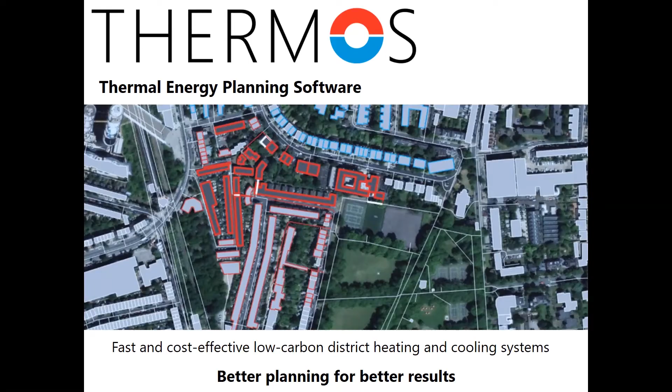Heating and cooling is one of the most crucial parts in order to eventually accelerate the energy transition as a whole and connect the different energy sectors. THERMOS can be part of that transition and accelerate it. ICLEI is of course not the only one who has developed this software. In the lead was the Center for Sustainable Energy, but many other partners were involved in this Horizon 2020 project, within which THERMOS was developed. We had two universities, Aalborg University and Imperial College London, and also consultancies and energy experts, institutions like Dena, Creara, Cape.

Because the focus was on helping cities in the first place, we had 8 different cities across Europe involved in sharing their needs and guiding the development of this tool, and that's why it is based on city needs and driven by cities. In a nutshell, it's an optimal solution for 4 key scenarios: the expansion of existing district heating and cooling grids, identifying local energy demands for known energy sources, and finding the best route for any pipe work.

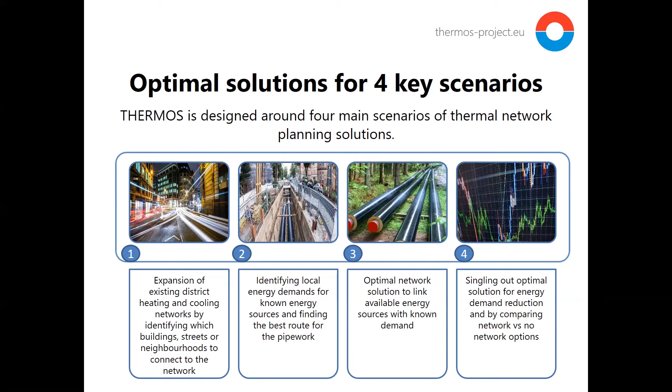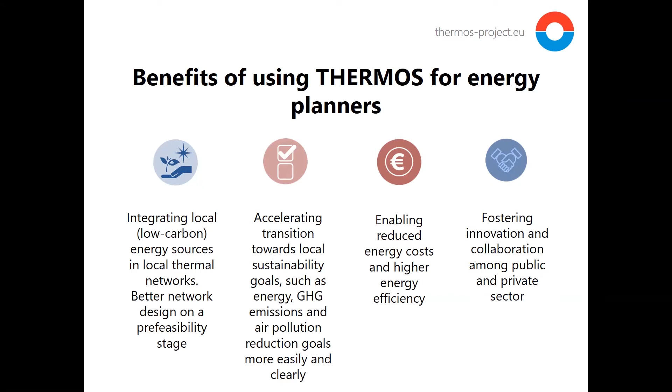It's a solution for optimizing the network to link it with available energy sources, also waste energy and renewable energy sources, and it provides you the opportunity to single out different options for how to best plan your district heating and cooling system. It has many benefits. One benefit I find quite interesting: through the visualization, we are enabling different stakeholders to participate, political decision makers, energy consultants, in dialogue with municipal technical staff, universities, and so on, with different levels of expertise, to decide about the best and optimal solution for local thermal networks.

There are many stakeholders this tool is for, local and regional authorities in front, but soon we realized utilities, research, academia, project developers and consultancies were also at the very core of this software. So I'm open to hear your thoughts on how to use THERMOS within your perspective and application. Last but not least, we have tried to build trust in the software, validating it through various universities, engaging experts on an advisory board, and through our ambassador and train the trainer program bringing in different perspectives and knowledge. It's open source software, ready to be released by the end of this month. So stay tuned.

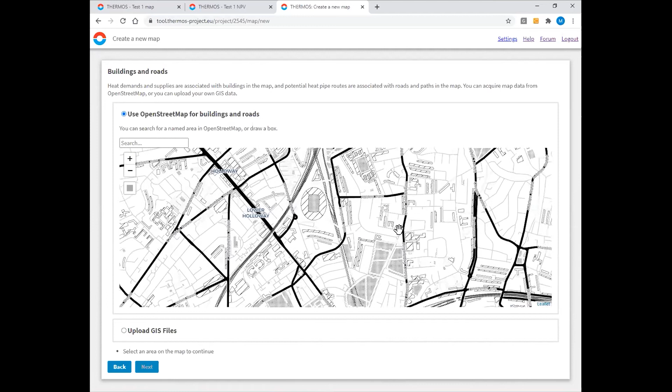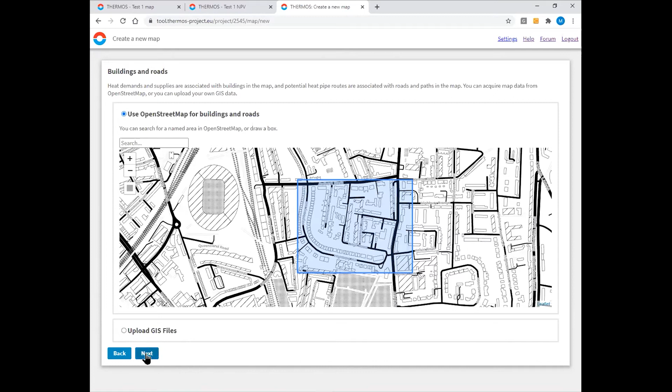So as you open this, it defaults in London. So what you can see there is central London in Islington. And if you zoom in a little bit further, you can see the buildings come into view. And what I'm going to do is select an area that we're going to be interested in, and we're going to select that area to import as a map within THERMOS and have a look at potential networks there. So I've selected that, click on next.

This is a relatively new feature. This checks whether there's LiDAR coverage for the area that you've selected. Now, LiDAR is a data set which basically gives you the height of buildings. It's not available everywhere, and it's very much up to the user to find out if there's LiDAR available for the area that they're interested in. It's sometimes not that straightforward to get hold of. In some cases, you have to pay a little bit for it. But the reason it's important to have it as far as you can is that it improves the accuracy of the energy demand estimates within THERMOS, because otherwise, if you're just using OpenStreetMap without LiDAR, it will estimate in a kind of two-dimensional model.

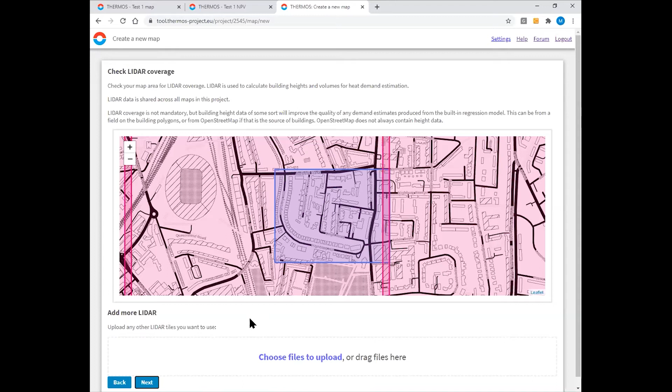So it just looks at the building footprint and the type of building. But where you have LiDAR, it will know the height and the volume of the building, and it can start to infer the surface area of the walls and the heat loss along with the type of building, and make assumptions as to the heat loads there. So in this case, there is LiDAR for this part of London available.

And then lastly, before we create the map, we just have to set the heating degree days for the area that we're looking at. We've tried to automate this according to the location. So this is basically a weather correction for the location, depending on the climate there, to adjust the energy demands. And you can also set it here. It's just a way THERMOS will group similar buildings along the same part of a street. It just makes the calculation a bit simpler, a bit less complex, if that's appropriate.

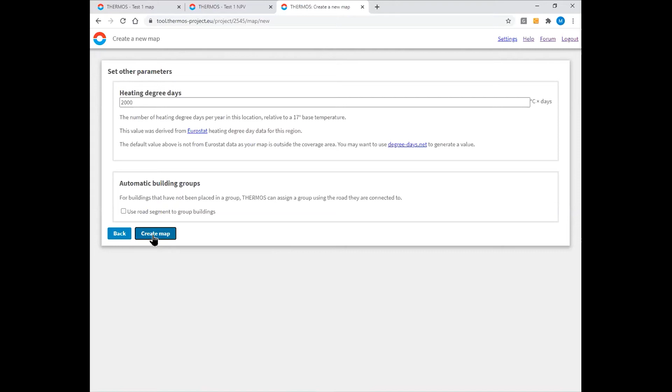We're now then ready to create the map. If I click on Create Map, you can see here that that map is now being imported. So it's taking that data from OpenStreetMap, the buildings and roads, the geodata there, and it's undertaking calculations on those buildings to establish the heat demands. And you can see the map's now finished.

And the next thing to do is to have a look at that map and start to create scenarios for networks. So if I click on HeatNet here, what we'll see is the main user interface of THERMOS. And you can see there, this is the area that we've selected and imported. It's a collection of buildings as polygons and road segments there. So I'll just turn off the satellite view just to make that a little bit clearer.

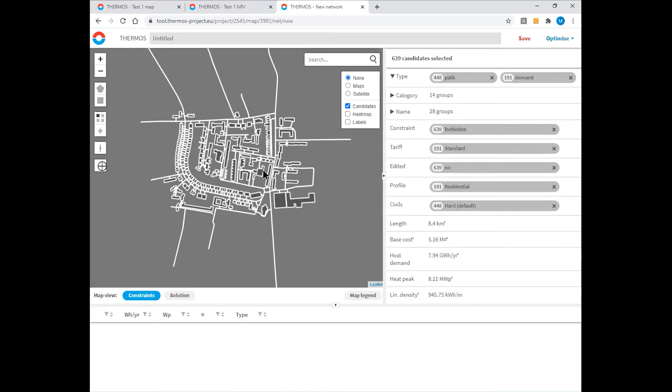And what we can do now is, for example, I can select, hang on a sec. That's better. If I select all those elements, whatever you've selected, this right-hand panel will tell you a list of information about that. For example, what we've selected here is 448 different segments of road pathways and 191 demands, so buildings. We can also look at the categories of all these elements according to OpenStreetMap.

So we have one place of worship, a church. We have 324 residential properties, for example. And also down here, we can look at the collective heat demand in terms of the peak in megawatts and the annual heat demand in gigawatt hours for that selection.

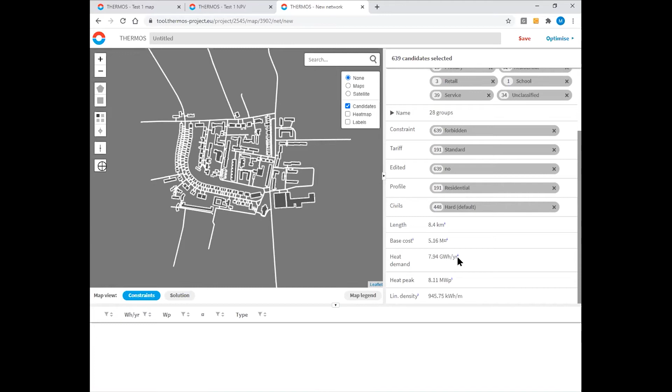So we're ready to start to create a scenario to build a network now. The first thing to do really is to select an energy center, an energy supply. So I'll just click on one of these buildings and say that's going to be my energy center, and make that a supply point. We now have to specify what that supply point is. The bare minimum is to say it's got a maximum capacity of 10 megawatts. So you can put numbers in here.

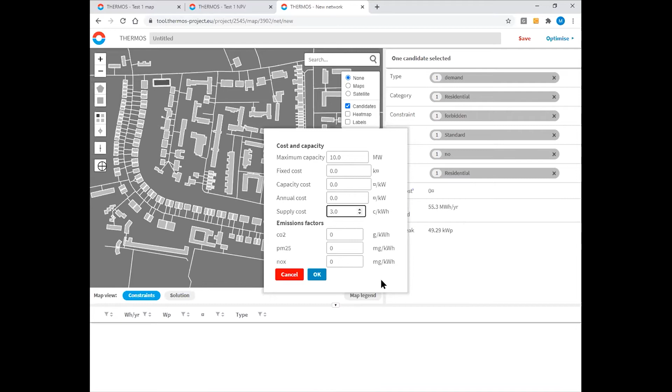You can also put your costs in, but I'm not going to do that for this demonstration. The two minimum things are the maximum capacity and the cost at which that supply center can provide heat. So I'm going to put 3 monetary units per kilowatt hour there, say 3 euro cents per kilowatt hour. And you can see it changes color to indicate that that's now a supply rather than a demand. It can also be a demand, but we're just considering it a supply in this case.

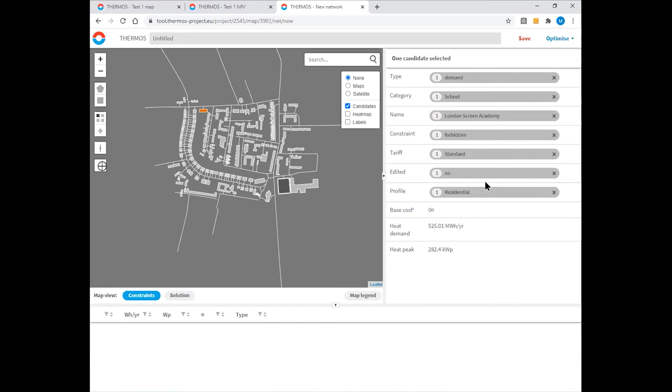So the next thing to do is to look at the rest of the buildings and the routes and say, which of these do we want the model to consider for the possibilities of making a network? We can select different elements here if we want to, just by clicking on them, and again you can see information about that selection in heat demand, heat peak, and also roads. You can select the road segments as well, and it gives the length, for example.

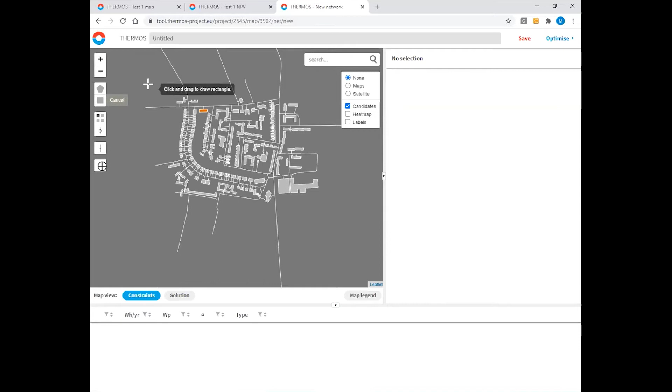What I'm going to do is select all of it really, and we can then toggle the status of each of those elements. And there's three kinds of status for those. If they're white, it means that they're not going to be considered at all in the network.

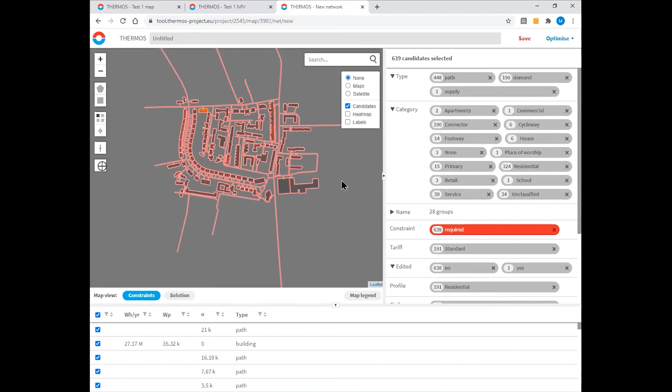If you toggle them to go blue, it means that the model will consider them as optional. The model will make up its own mind whether to include them in the network according to all the parameters that have been set. And if it's red, then it means it's mandatory, that must be in the network. If you wanted a building to definitely connect to the network, you can set its status as red. What I'm going to do is leave it as blue, leave them all optional for now.

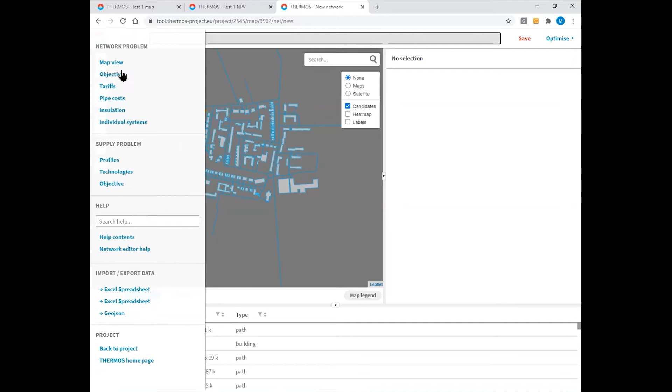So we're almost ready to run. What we have is the supply and a whole bunch of buildings and routes to those buildings. There's a few more things to set in terms of parameters. I'll just quickly go through some of these. There's a left-hand menu here. I'll just go through the most important ones.

First of all, there's two objectives that you can choose from when you're doing the optimization. First of all is where it just maximizes on the network NPV, net present value. So this is basically maximizing revenue to the network operator. And the other one here is maximizing the whole system NPV. So the aim of this is to minimize the overall cost of heat. So it's a slightly different approach.

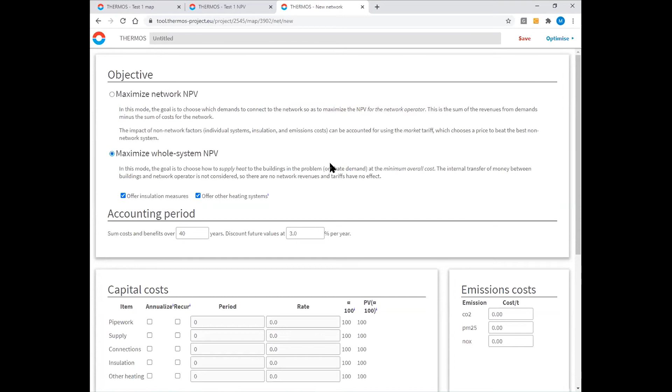And in this objective, you can tell the model to actually offer insulation measures to properties, and also offer other alternative heating systems for buildings where the model considers it cheaper or more beneficial not to connect that building to the network. So there's two choices there. I'm going to leave it for network NPV for now. I'm not going to go through the rest of those just because of time constraints, I'll just quickly go through some of these others here.

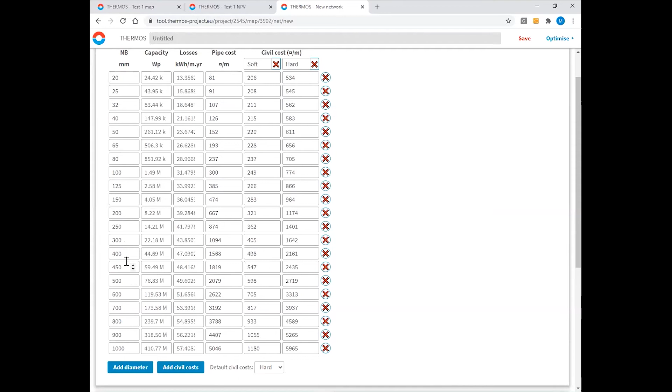You can set tariffs if you're on a network NPV optimization mode, and you can specify connection costs. Importantly, you can specify pipe costs as well, and we have a table here with some default values in. So pipe costs according to the size of the pipe, and there's the cost of the pipe itself, and there's also what we call the civil cost of installing it.

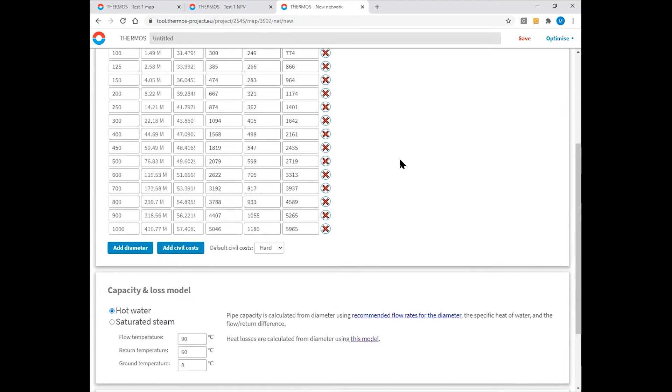So basically soft or hard dig, as we say, depending on the ground that you're installing the pipe in. Obviously that affects the cost if you're installing in a road rather than in a field, for example. But you can specify your own there if you want to. And you can also specify the heat transfer medium, whether it's hot water or steam. And we've got pumping costs down the bottom there.

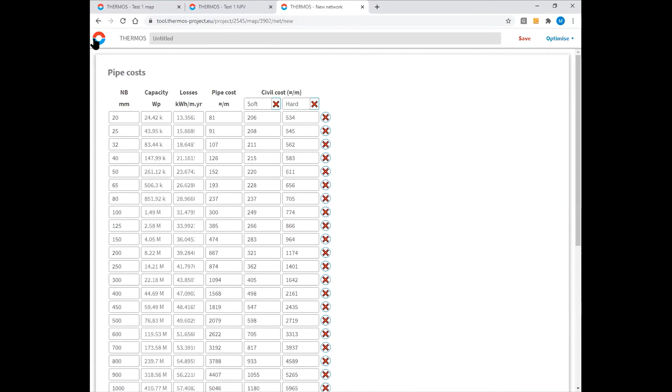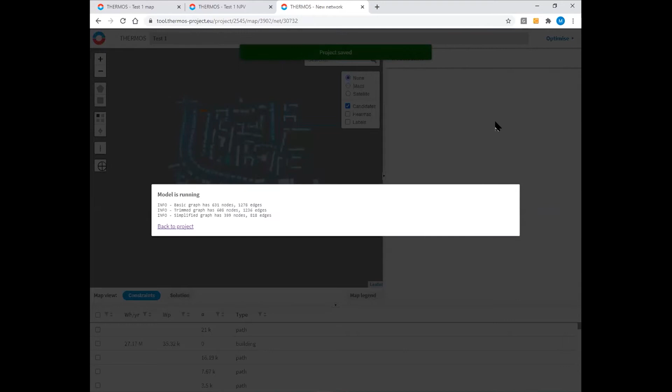So we are just about ready to try to optimize now. So what we'll do is we'll just name this and save it. And top right hand button, you can see optimize, and we'll click on network. And what it's doing now, it is optimizing. This can take a few minutes. But when it happens, there's this kind of script that runs that tells you what's happening.

But what I'll do, if I can get to, I've got my bar in the way here in a minute. Right, that's better. Here's one I prepared earlier, basically.

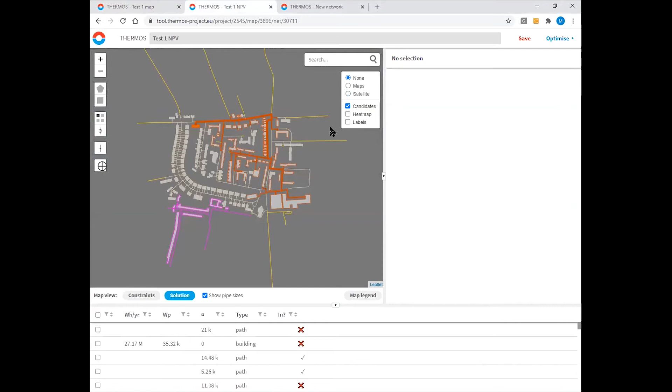When it finishes optimizing, it would probably take about 5 minutes in this case, but this is what it comes up with. And you can see it's actually formed a network there. The brown elements are the network. So you can see the supply there, and it's supplying all these buildings. So that's what it thinks is the best option for that objective that we've set.

You can see there's a map legend here, so there's a kind of a color code, so you can see exactly what's going on. The purple elements are parts of the network that can't be reached. Maybe there's breaks in the routes there. The yellow elements are peripheral to the network. They're just not needed, and the rest of it is really just not in the network. And we can just filter on the network itself, just to make that a little bit clearer.

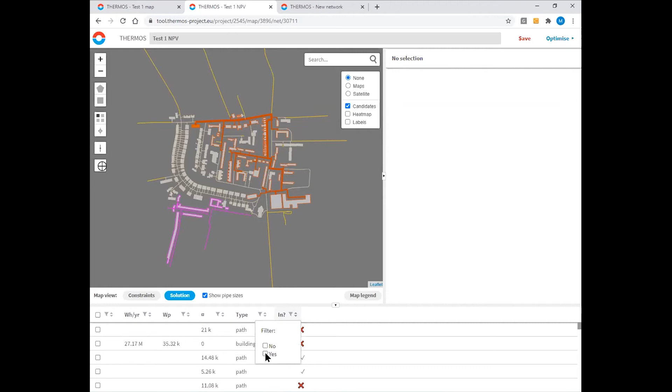So that's selected the actual network elements now, and again in the right hand screen you can see what that consists of in terms of the number of paths, the demand, so the buildings, and also down here the total heat demand of that network. And you've also got the capacity and the heat peak. So heat peak is obviously the sum of all the demands, but the capacity is the diversified demand, which is actually a little bit lower than the heat peak. So yeah, that's essentially the process of optimizing.

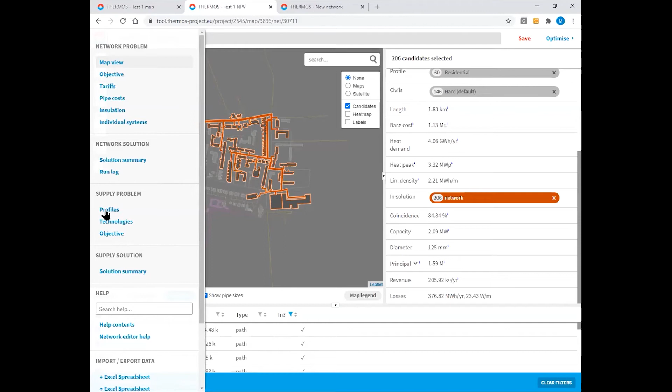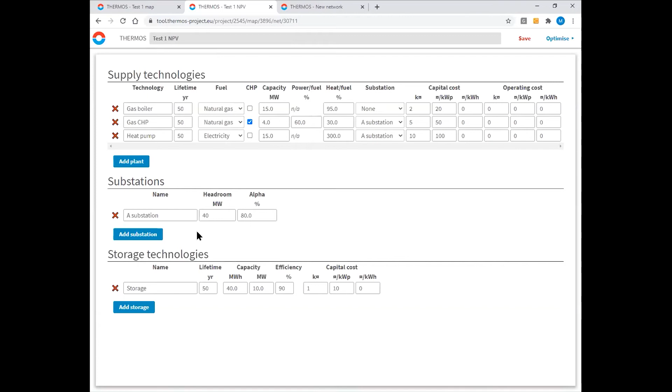Couple more things to just quickly mention before I finish. You can also optimize a supply. So this is a kind of separate process where it looks at the supply in a bit more detail, and you can specify like a time series for the supply. It looks at hourly profiles of heat, demand and supply, and also costs. And you can then specify technologies for that supply. And you can also, if it's a kind of CHP technology, include substations and also storage technologies as well. And then there's some objectives that you set around some financial objectives and options there.

So setting up a supply problem as well, and then you can optimize on supply as you can with the network, but it's done separately. It's too complex to do both the supply and the network at the same time. So it's more of an iterative process to just kind of get the best match between the two.

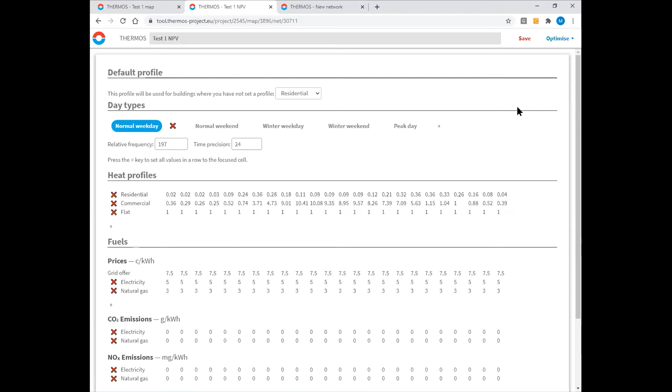So yeah, just nearly finished now. Also to mention, THERMOS also does cooling. It's a much more basic model because of just lack of robust data really. But when you create a map, you can import it as a cooling map rather than the heating map. And also, down here, this is quite a useful feature where you can download a spreadsheet. So it will export all the parameters that you've put in and results, which you can then adjust according to what you're doing and edit, and then upload that again. And it just saves having to go through, if you're creating another scenario, the whole lot and updating all the parameters. It does that automatically.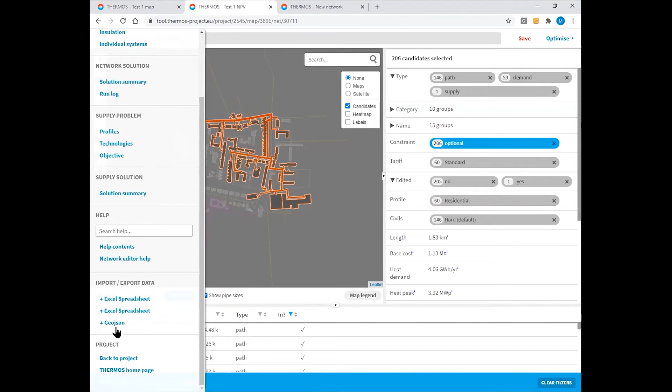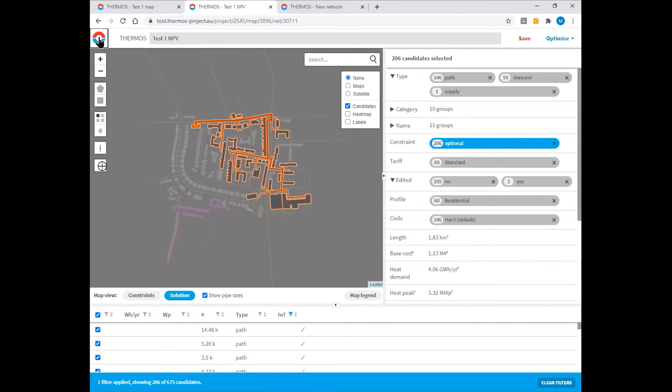And you can also download a GIS file of the outputs and what you've created. And I think we're going to turn that into a geo package, which is a bit more of a sort of modern way of doing that. And finally, I should mention also there's quite a comprehensive help facility with THERMOS. We're in the process of updating that, but it does include the theory behind the models that we use. There's two main models, one on energy demand, and one on optimizing networks. So please, if you do have a play with THERMOS, have a look through that. There's a kind of introduction and quick start overview as well.

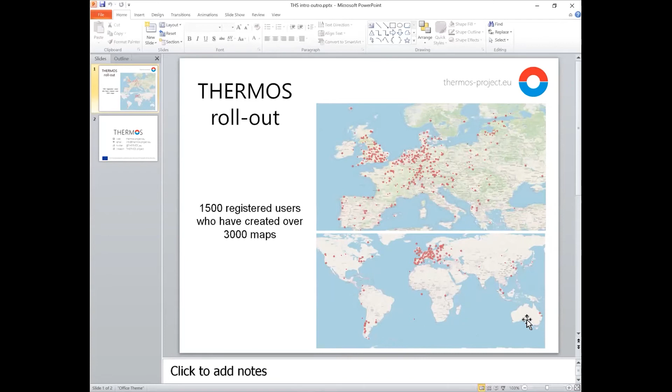And just finally to mention that the last bits of work that we're doing is around validation. So we're just continuing testing of THERMOS. I just thought I'd show you this at the end as well, how THERMOS is rolled out. This map is showing all the registered users as of a couple of weeks ago. We have 1,500 registered users across the world, actually. And between them, they've created over 3,000 maps. And this is the distribution of those. Each of those red dots shows a map that has been produced within THERMOS. So obviously, there's a lot in Europe, but interesting to know that it's being used in the US, in South America, and right away in Australia as well.

Yeah, thanks again, Martin, for this very interesting introduction and for this hands-on on how to build up a heating grid with THERMOS. Now, if I may briefly introduce myself, my name is Simon Niesen. I work at the Münster University of Applied Sciences, and I'm project leader of the Task Force Wärmewende or Warmtetransitie or heat transition, whatever language you like most.

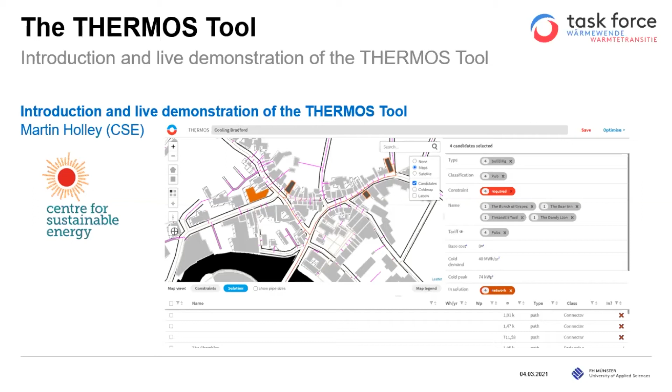I would now like to briefly tell you how the task force using THERMOS can help you and/or your municipality to really tackle the heat transition, because that's basically what we do in the task force. We like to tackle the heat transition on a municipal level.

Well, as you know, there are technical and market-driven solutions available. So the question really is, why are there so few sustainable heat supply systems, although the heating sector is responsible for vast amounts of CO2 emissions? One answer to that question is that very often municipalities lack the opportunities to address this issue

and to address the heating transition. So our aim is to assist you and your municipality with using heat planning tools such as THERMOS, and on top of that, testing the use of virtual reality to really highlight the chances of a heat transition in 3D.

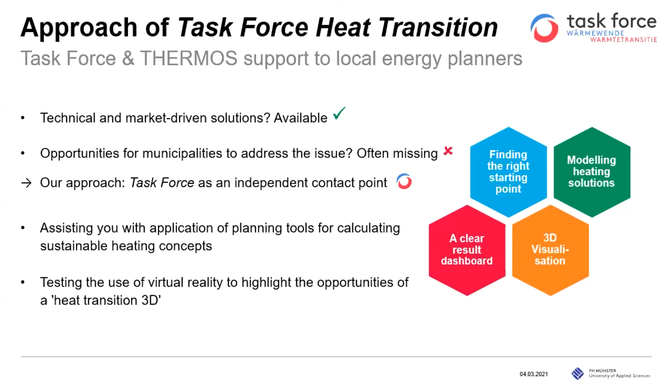Now, if you approached us as the task force and asked where to start or even go on with the heat transition in your municipality, we would try to identify in a first step potential projects or potential project areas where heat networks already make sense today. Those places are usually spaces where there's a high heat demand, a specific heat demand per area.

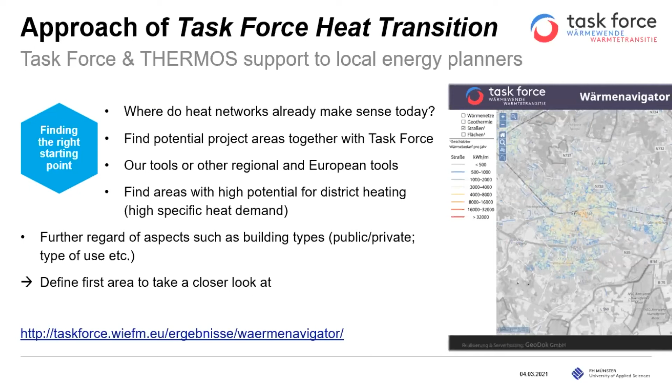And we would use those tools to identify places with a high specific heat demand, while considering other aspects such as building types and the type of ownership, so private or public ownership, and some other aspects. That way we then can decide on which area we should focus in a first step.

After that, we would use the THERMOS tool together with you and your municipality, and then create a project, as you've just learned how to do, for that specific area. And we choose building types and potential heat sources that should be in the network.

We would then within THERMOS carry out a first analysis that can also include configuring alternative decentral heat sources in the buildings. And we'd set up some potential heat supply scenarios. The main benefit of this procedure is that you can very quickly obtain initial results as a basis for further and more detailed planning with engineering offices, for example.

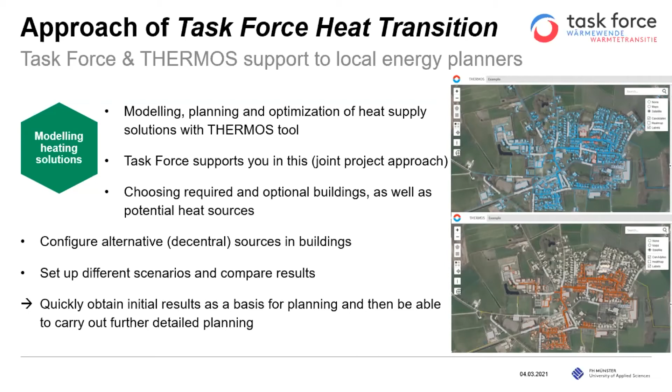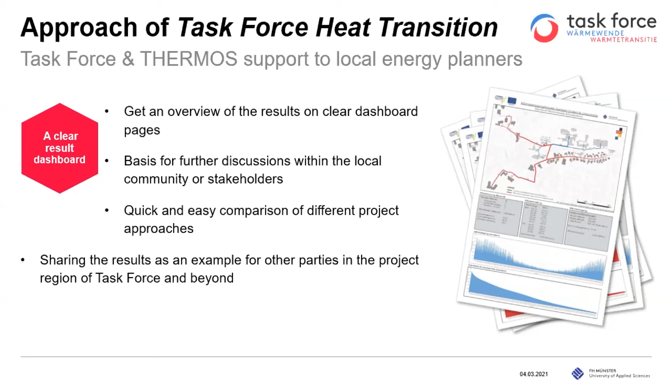So we could really play through different scenarios, which buildings to include, how to set up the heat supply, and make all those scenarios comparable to each other. Afterwards, the results can be used as examples and as best practices for other parties. That's also something where other parties can really profit from your findings.

That way we can visualize different solutions and different project scenarios, and we like to do that because we think that visualization brings the benefit of acceleration and support of communication and further planning in politics as well as in public.

So building such a 3D model of a district heating project may really facilitate the understanding of the project, and that way reduce barriers. For example, some people might not really want to have such a huge seasonal heat storage in their municipality. So we could, with those 3D models, visualize how it can be integrated into the landscape. And again, we'd like to share those results as well as best practice with other parties.

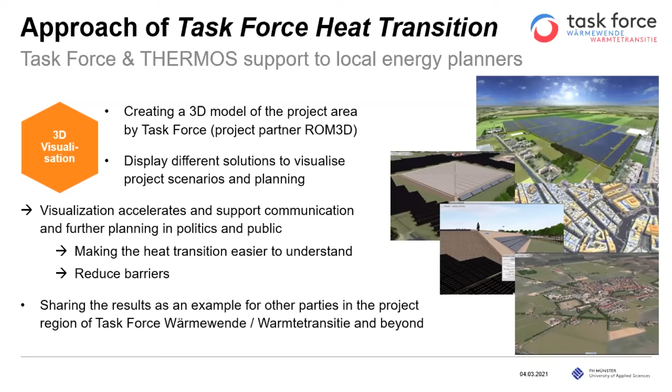So to sum up this very brief introduction of what we can do with applying THERMOS to your municipality, let me once more tell you what we think the steps are that need to be taken to get to a sustainable heat supply. First, you and we would need to explore the current situation in your municipality and identify the potential for sustainable heating by making use of the opportunities and tools that are already and often freely available.

We would connect relevant municipal or other stakeholders and get one step closer to a sustainable heat plan, because all those actions show your will to become sustainable in heat supply. That's basically what I wanted to say.

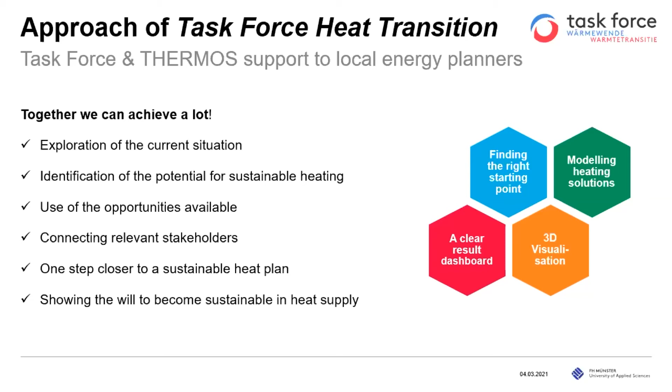Thank you, Simon. And also, Rita, it's wonderful to have you. So I'm very much looking forward to your perspective, as you have accompanied the project and the process of the development of the software since the very beginning as a senior expert, particularly focusing on renewable energies, from the German Energy Agency, DENA.

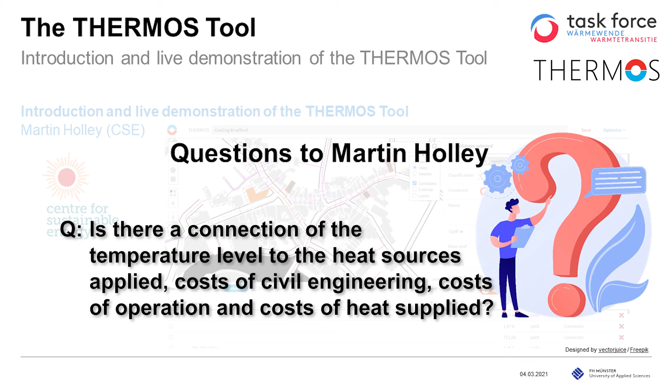And in terms of the engineering and operational costs, you can specify those. So costs are made up of, as I said, it could be a fixed cost. Then on top of that, it could be a cost per megawatt or a cost per kilowatt you apply, and the cost of the heat supply. So that would be in cents per kilowatt hour, for example. So you can specify that, yeah.

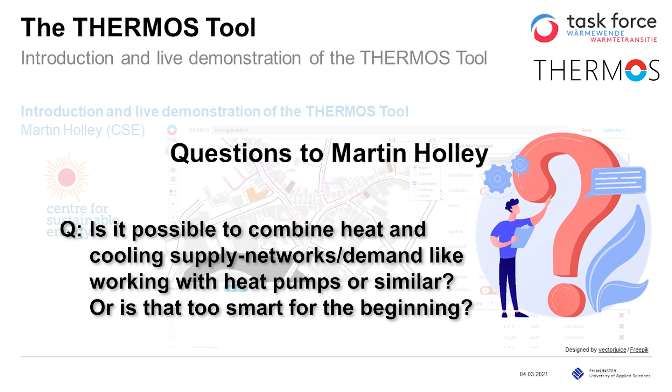And I see the questions are popping up, so that's a good thing. Is it possible to combine heat and cooling supply network and demand, like working with heat pumps or similar? Or is that too smart for the beginning? It's a bit too smart for THERMOS. You can optimize a cooling system, a cooling network, but it's done separately to heating. THERMOS is not able to do it simultaneously and combine that, so you have to do it separately. Again, it's just complexity that's the constraint there, really.

Yeah. I think this is going to be the last question for now. Can solar district heating be integrated? Sorry, could you say that again? Can solar district heating be integrated? Solar heating. Yeah. As a heat source, you can specify that, to the extent, again, that you specify the set of parameters that THERMOS understands, and you can introduce some storage to that as well, which obviously is associated with solar thermal systems. So the supply technology is fairly neutral with THERMOS. It's all about how you specify the parameters of that energy supply source.

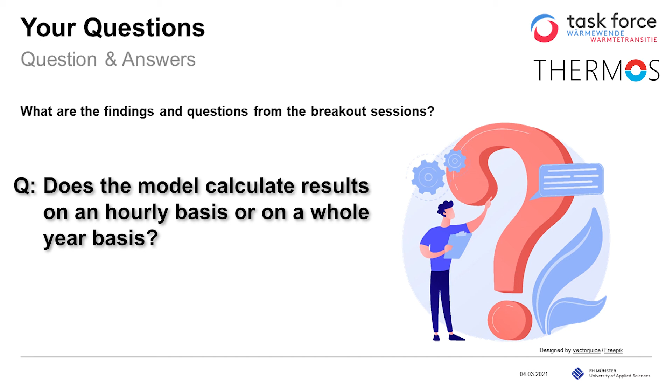It's only when you look at your supply and you're optimizing on the supply, that's when you can start to define a profile for the heat demand on an hourly basis. And you can set different profiles according to a generic building type, such as residential buildings. You can set that profile, how the heat demand might vary across a 24-hour period. And then the model will consider that in terms of the energy supply that you've specified and any storage, and how all that interacts to meet that demand. Yeah, thank you, Martin.

And then there was a question we hadn't the time to look much into, also the optimization, how you can prioritize different outputs. You, for instance, can prioritize via costs, but you can also prioritize CO2 emission savings. And by the way, this was a demand formulated by our cities who were part of developing the software. Here a question concerning the CO2 emission savings: how are those emissions quantified? On which databases are they quantified?

Again, it's user specified, so you can specify emissions. If you're optimizing on the network, then you just specify emissions limits in terms of carbon dioxide. You can also look at emissions limits for particulates. I don't know if you're familiar with the term PM2.5s, what we use in the UK for these small particles that can cause health issues, and also NOx, nitrogen oxides.

So you can specify those both in terms of cost, so cost per ton, for example, of those emissions, or in real terms in the actual amount, tons per year of emissions. So it doesn't draw on any kind of established figures. It's user specified. And one thing that we're focusing on in the last few weeks of the project is to explain in the online manual more information on the default parameters that the tool offers, and guide the user on where that came from, and maybe signpost to further information.